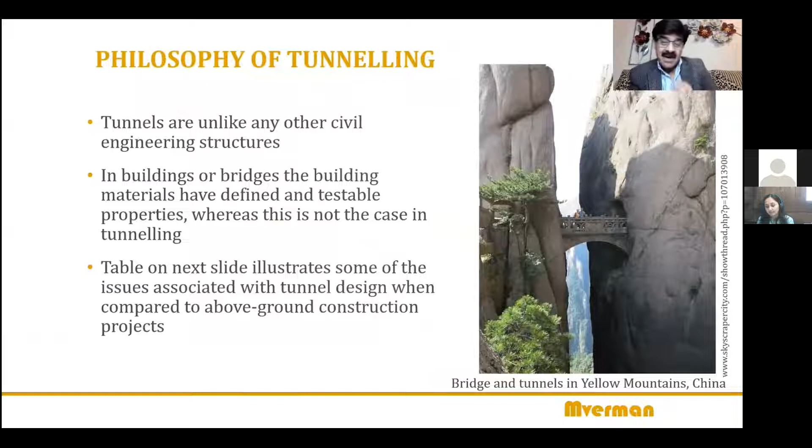We've already discussed one of the challenges. Let's talk about a bit of philosophy to understand the next one. Tunnels are not like any other civil engineering structures. Other structures, like the building you're sitting in or bridges—surface structures—are built using material such as concrete, bricks, and mortar, which have defined and testable properties. But that's not the case with tunneling. We'll talk about it in a bit, because there's a table coming up on the next slide showing some of the issues associated with tunnel design compared to above-ground construction.

So let's compare these two types of structures—traditional civil engineering above-ground construction and tunnel construction—on the basis of three parameters: construction material, loads, and safety.

As far as construction materials are concerned, buildings, bridges, and surface structures are built using man-made materials which have testable properties, and those properties can be guaranteed by quality control procedures. But that's not the case with tunnels, because tunnels are built largely using natural ground—soil, rock, alluvium, colluvium, debris, boulders—and we don't have the capacity to influence its behavior.

As a civil engineer or structural engineer, you can say 'I need M35 concrete, even M32.5 concrete,' and you will be given it. But you cannot order that you'll only build a tunnel where the compressive strength of the rock is 120 MPa—you can forget about building a tunnel. You have to build that tunnel in the given ground conditions. It is a major difference.

Coming to the loads—for the structural analysis of surface structures, you know the loads: the live load, the dead load, the wind load, the earthquake load, all kinds of loads, and you can design your structure for that. In tunneling, forget about it. You have to make assumptions. You're never sure about the loads, particularly for deeper tunnels.

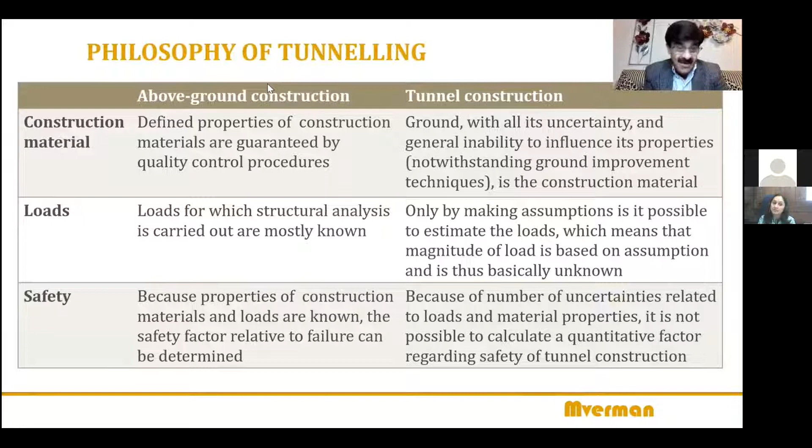Yes, those are man-made materials, but these are support systems installed after excavating the tunnel, because once you excavate, you remove material that was there for millions of years. So the stresses readjust, and the physical manifestation of that readjustment is that the excavated tunnel converges. You do not want to permit a lot of convergence, so you install some support.

So yes, those are man-made materials, but by and large, it is the natural ground which is the key material used for tunneling—the soil, the rock, etc. So the key to successful tunneling is to understand this material: the strength properties, the deformability, the stability characteristics. That is why investigation becomes so important in tunneling.

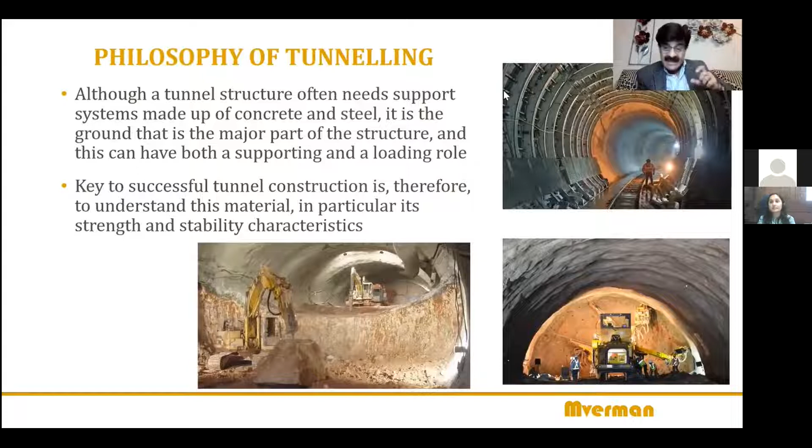But the fact is, it is the investigation which is not done properly in most tunnels. In many tunnels, it is difficult to do intensive investigation, and in many it is neglected. I don't have much time to go into it, but there are issues with this. So you can understand the challenges of tunneling.

Now, I have skipped a few slides in the interest of time, and come to this slide. There have been many questions raised about tunneling because of the uncertainties. Many of those questions do not have a single answer, but depend on the individual case, because no new tunnel construction is the same as the previous construction.

If you come across somebody who says, I have built many tunnels in similar conditions, don't worry, it'll be a cakewalk—stay clear of that person. Never underestimate the challenges you can expect in any tunnel.

The key to understand is that tunneling is not a discrete science. It doesn't have definite answers. There are many unknowns when dealing with tunneling, and the answer to most questions is: it depends. So therefore, you need experience and engineering judgment to help make a considered and informed decision. At the end of the day, you carry out the design based on several assumptions and approximations.

So when the tunnel actually goes for construction, a good designer would be biting their nails, because now is the test of whether the actual tunnel will behave exactly as you perceived. So you have to carry out extensive monitoring and instrumentation once the tunnel starts to be built, so you are sure it is behaving just as you thought during design.

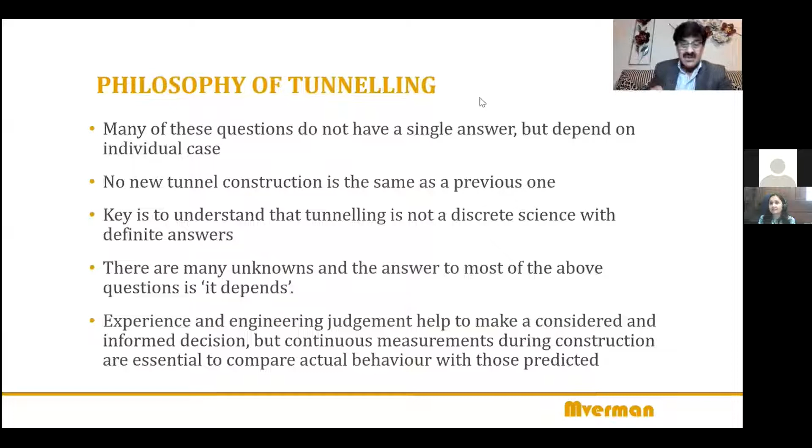So more challenges. Now let's talk about some more challenges in tunneling. When we talk about typical civil engineering structures, we talk about two major aspects apart from others: design and construction. In tunneling there are three: design, yes; construction, yes; but also tunneling approaches. These tunneling approaches play a very, very significant role in tunneling.

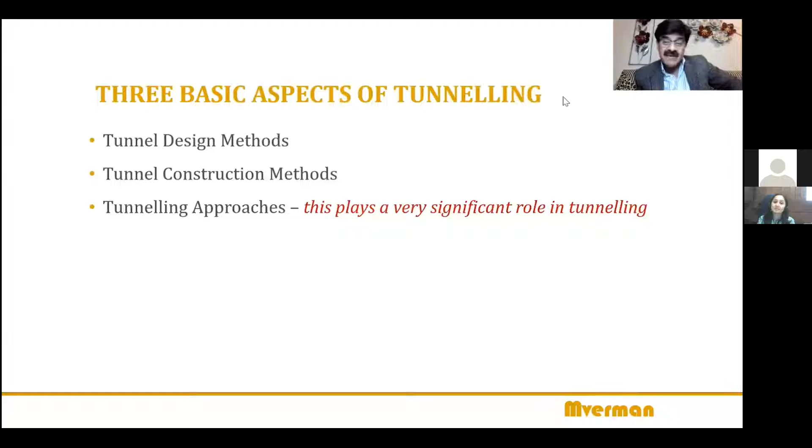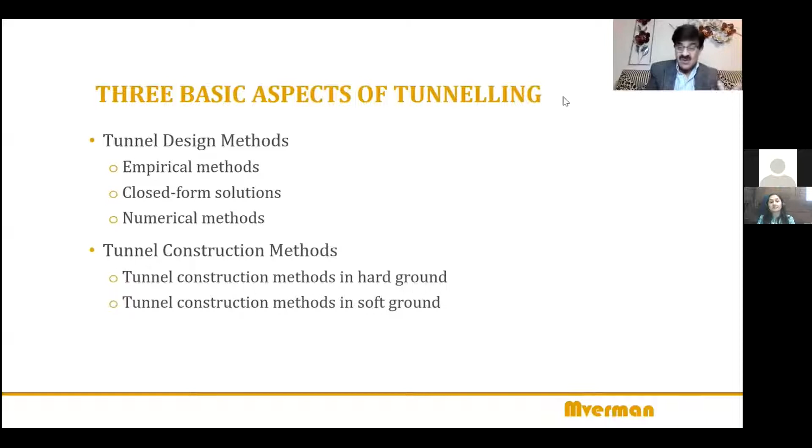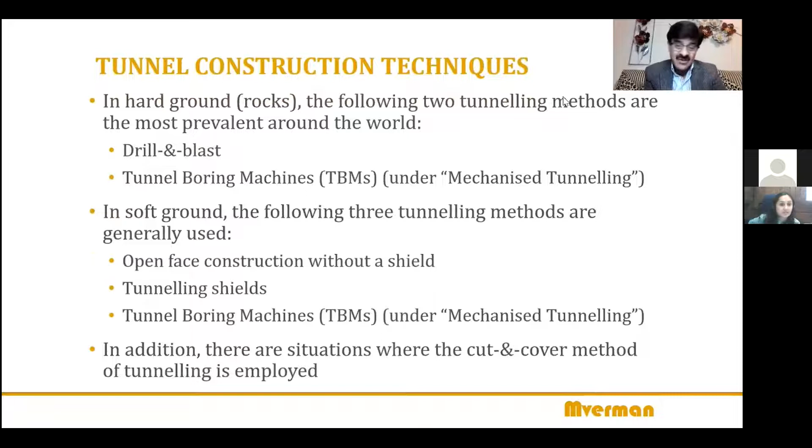What are these approaches? When you come to tunnel design methods, there are several, and there are challenges—unfortunately I don't have time to go into it. Tunnel construction methods differ for hard ground such as rock and soft ground such as soil. Here are some methods listed for hard ground and soft ground, and other methods not strictly tunneling but used in tunneling projects. Again there's no time to go into it. So: design, construction, yes, but also tunneling approaches.

Many of you must have heard about this term called NATM, New Austrian Tunneling Method, one of the most widely used terms in tunneling, and therefore one of the most misunderstood terms in tunneling. Some of you may have heard about Norwegian Method of Tunneling, NMT, and a smaller number may have heard about TBM tunneling. All of them very exciting, and if you go deeper into these three topics, you gain a lot of wonderful insight into how tunnels behave when you construct them.

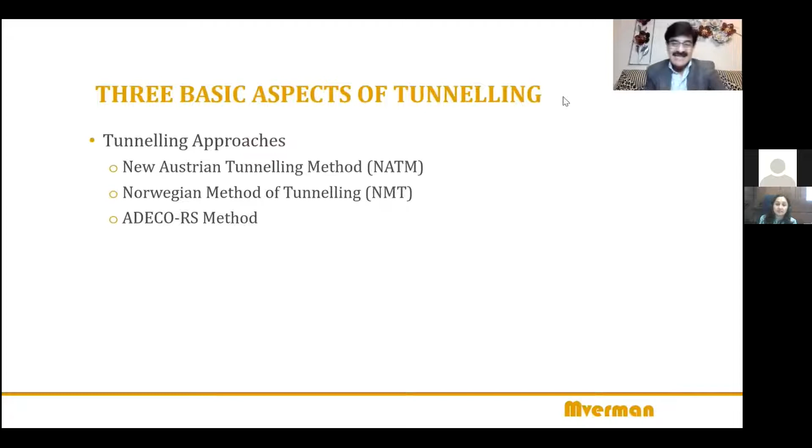But this additional aspect which you have in tunneling, which you don't have in other civil engineering structures, lends another challenge to tunneling. And when I talk about challenge, I'm not talking about it as a negative term. I see anything which has challenges as exciting and adventurous. That's how I look at tunneling, so tunneling is very exciting because of the challenges.

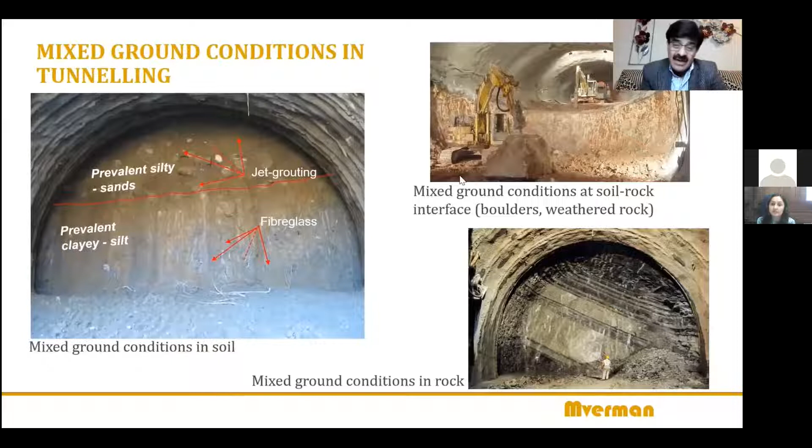Similarly, there are some other examples of mixed ground conditions here, and these mixed ground conditions can pose a lot of challenge to tunneling. Again, there's no time because each of these topics requires half a day at least.

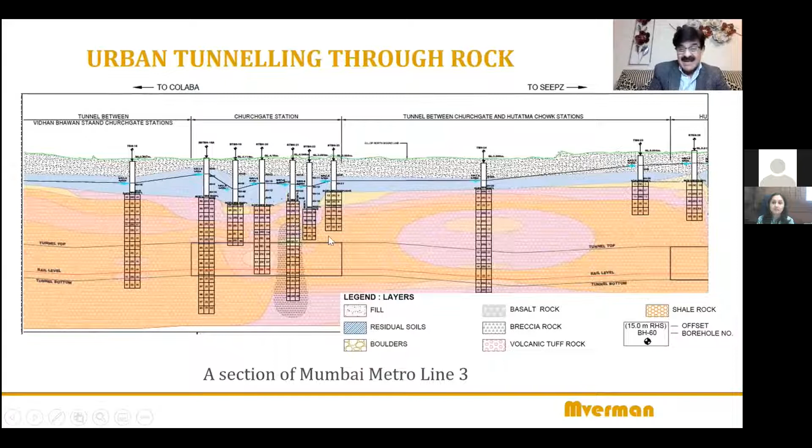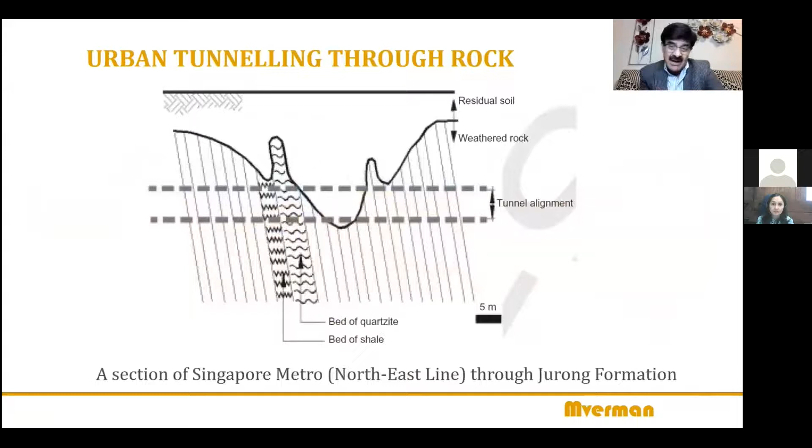I have to skip some of the examples because we don't have time. Example from Singapore - again, urban tunneling, again varying ground conditions, which put so much challenge in the tunneling operation. And some more description of these kinds of challenges in urban tunneling.

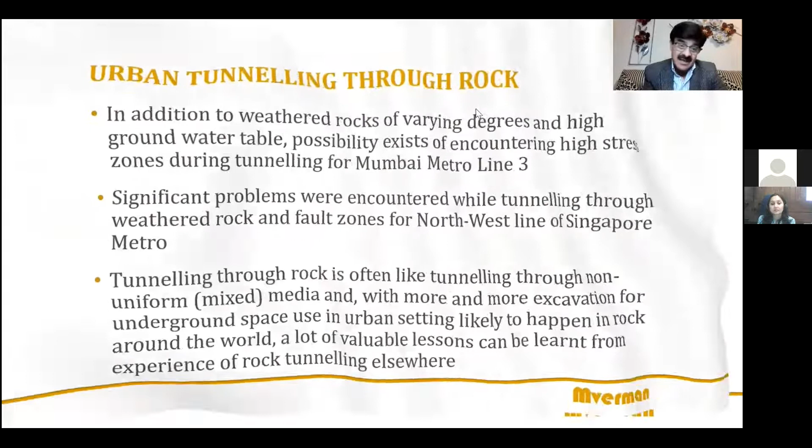Talking about mountain tunneling now. You see, you have a short time available and you want to leave an impression - do it with a lot of drama, go to the extreme, and that's what I'm going to do. I don't have much time, so I'm going to pick up the story of mountain tunneling with three of the most difficult tunneling media in the world, such as the Himalayas in the Indian subcontinent.

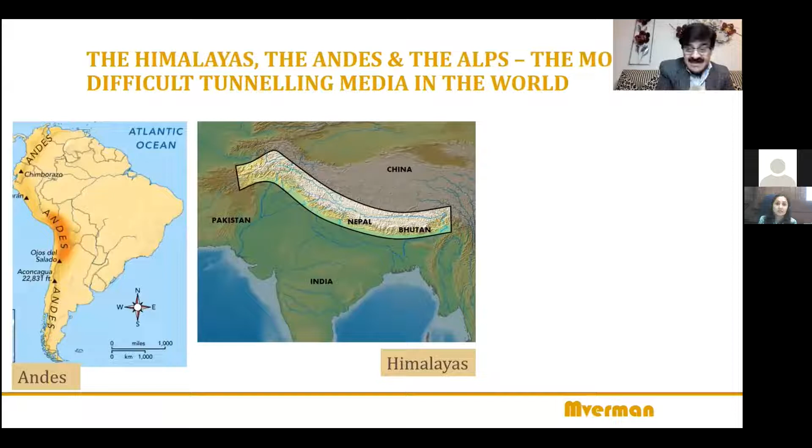You have bits of Pakistan, many Indian states, Nepal and Bhutan, and northeast of India. The Himalayas are considered the toughest tunneling media in the world, followed closely by the Andes towards the west side of South America, and that followed closely by the Alps in Europe. These three are younger mountain formations - geology is not fully settled.

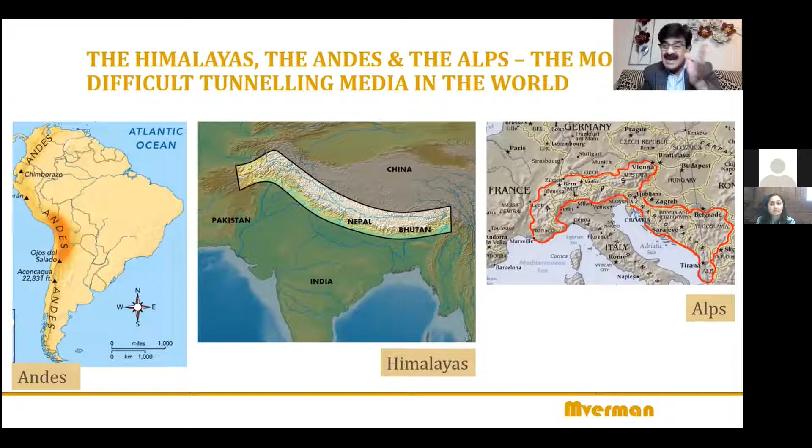So when you tunnel through these conditions, you have widely varying and frequently varying ground conditions, a lot of groundwater, high stresses, fault zones, shear zones, water problems like those, which can make tunneling an extremely challenging operation. Himalayas are the toughest, followed by Andes, and those followed by the Alps.

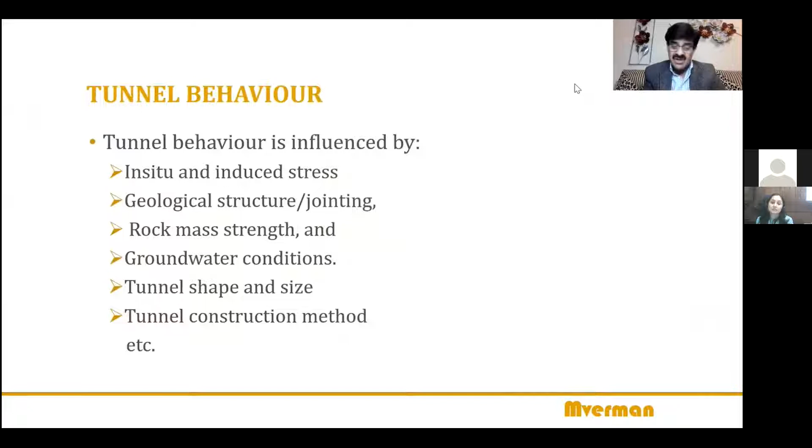Just to understand a bit more about what sort of problems you can expect while tunneling in these conditions, let's see the many aspects which influence the behavior of a tunnel when you build it, like in-situ stresses, induced stresses, geological conditions, rock mass strength, groundwater condition, tunnel geometry, tunnel construction method, etc. Now let's talk about only two of these aspects.

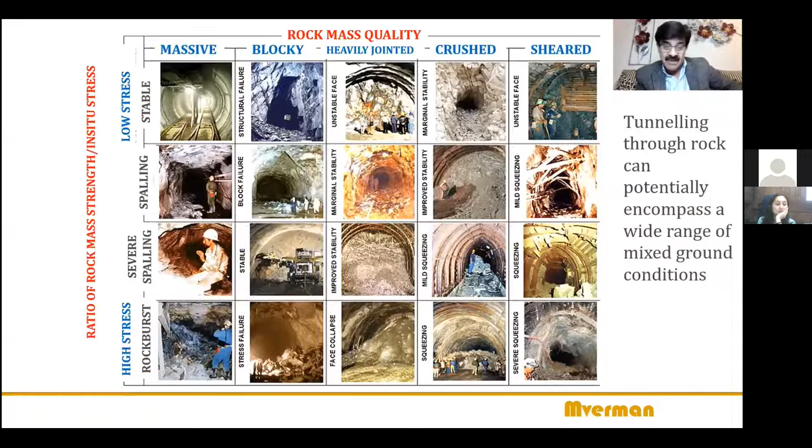Combination of these two aspects can result in so many different behaviors when you tunnel through these conditions. You can see that if you include more parameters, how much more challenging tunneling can become. When you have different behaviors, you need different design solutions. That's another challenge in tunneling in these conditions.

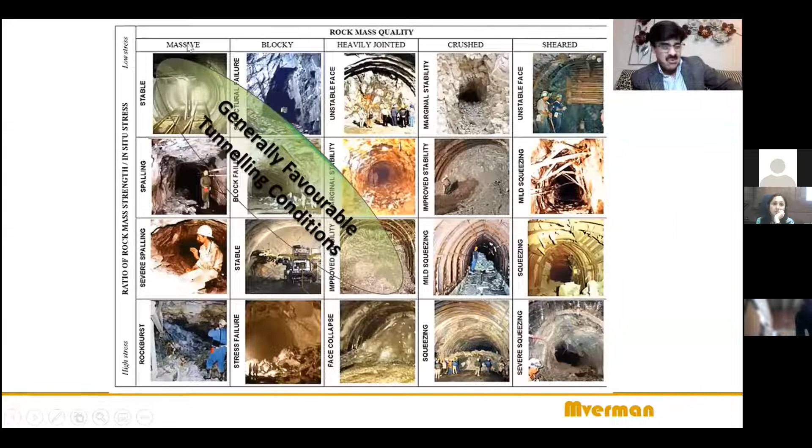For example, this little band here is generally favorable tunneling condition. The reason is massive means good rock mass. You would imagine good rock mass would be good tunneling condition. Yes, it is, but only when the stresses are low, because when the stresses start to increase, a good competent rock mass will not be that stable, and I'll talk about it in a bit.

So this band doesn't go down straight, horizontal. Why? Because when you have blocky rock mass, it's not massive, it has got more joints. Those joints, when they crisscross each other, form blocks of rock. These blocks can slide into the tunnel when you cut it, but only if they're not properly clamped. For example, here is one block, here's another block.

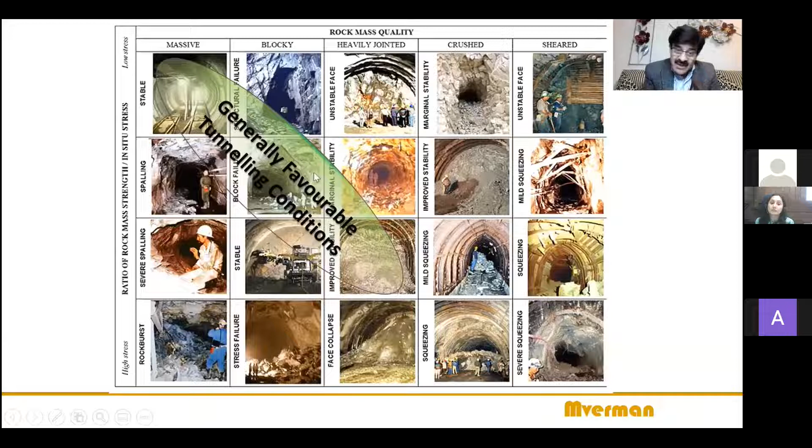If they are properly clamped, somebody pressing them together, then they will not slide into the tunnel. But when you have low stress, that stress is not good enough or high enough to clamp them together, so they will slide. That is why this favorable band doesn't go straight across. It goes down, because when you have some stress, that's good enough to clamp them together, but not too high, so it goes a little inclined for this generally favorable condition.

When you have this thing going from left to right, which means going from blocky to poorer and poorer rock mass, in low stress regime, this kind of failure will increase because stress is not high enough. You are in low stress, but the number of joints increases as you go from blocky to heavily jointed to crushed, meaning more smaller blocks, and there isn't enough stress to clamp them together. They're likely to slide into the tunnel.

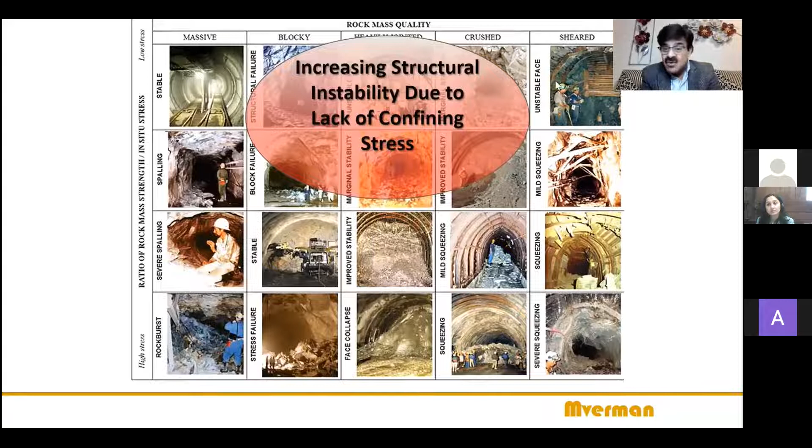So this is called structurally controlled instability. A joint like this is a structural feature of the geology, so it's controlled by the structural features. When you go in low stress regime, that's what can happen. In the extreme, you can have caving, and I'll show you a picture for that. Anyway, this is what I mean by structurally controlled instability.

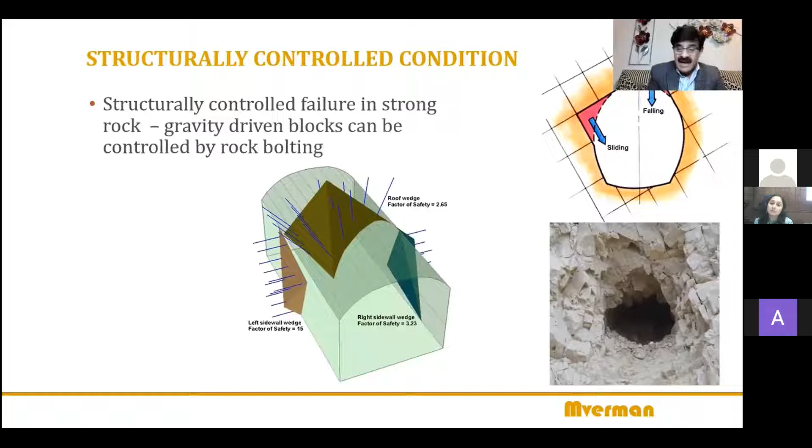When you have these joints crisscrossing each other and you cut a tunnel through this, these blocks, for example these red ones, can fall or slide into the tunnel, provided the joint between them has low shear strength, allowing it to slide. You can analyze this using a computer program and design support systems, in this case rock bolts. Here is an example—you can see the open joints which will allow these blocks to slide into this opening.

Here is an example from a project in Argentina, a 12-meter span tunnel, where from this place, one such block sliding along the joint has fallen freshly on the ground.

I experienced one in the state of Kerala in India, and we were standing in the middle of the tunnel. This was 1986. As a young engineer with stars in my eyes, I was standing with a group of senior people. I was looking at them, thinking how knowledgeable these people are. I didn't know much about tunneling. Then somebody says, Sirs, could you step aside because there's a truck coming?

So we moved to the side, and there was a puddle of water, so we went ahead 20 meters along the tunnel. As soon as we reached that place, we heard a loud thud, and we looked back. Exactly the place we were standing a few seconds back, a big chunk of rock like this came crashing down. That was the structurally controlled instability. We would have been flattened if destiny hadn't saved us. So I live to tell you the tale.

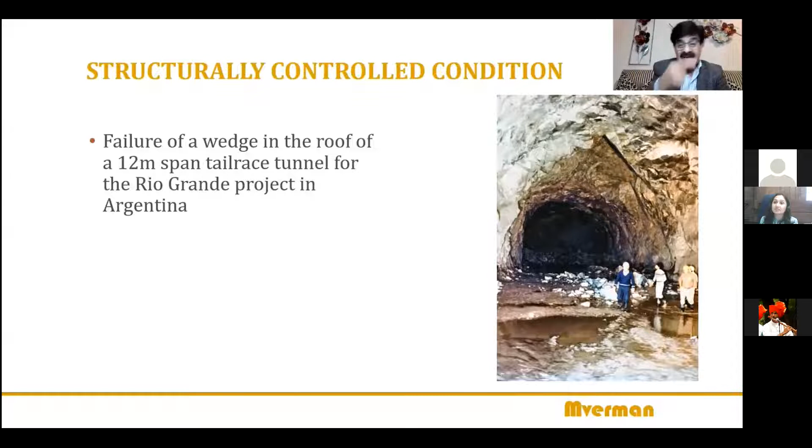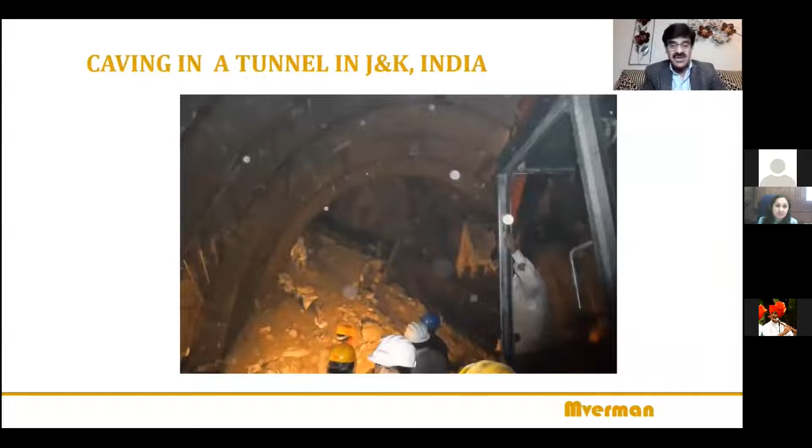What will happen? As the stress increases in good quality rock, it will behave in a brittle fashion. For example, this is my mobile. If I apply stress, you won't see much deformation, and suddenly it will break in a violent fashion. But if I hold a piece of rubber and bend it, applying the same stress, you will see a lot of deformation. You can visibly see that is ductile behavior. But a good competent rock will show a brittle behavior.

So what will happen? In the worst case, you will experience rock burst, which is a sudden violent failure. In deep mines, for example Kolar gold fields in India, now closed down with all the gold taken, at 2.5 kilometers depth, there is a lot of stress because of the depth, combined with good competent rock. When it fails violently, it can kill people. It has killed people, rock burst.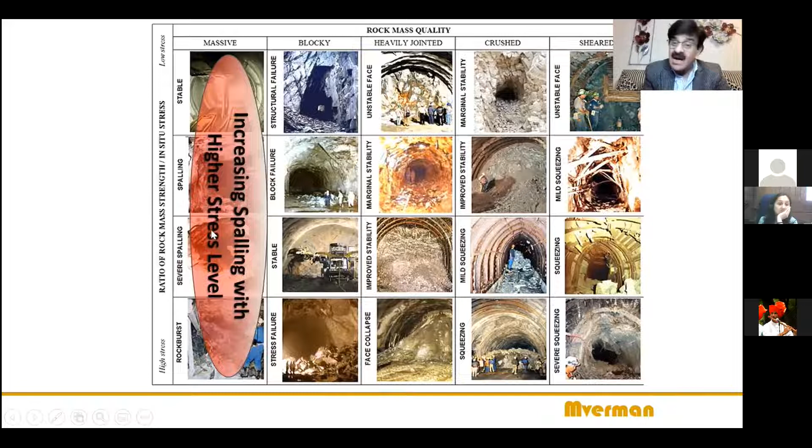Now, leading up to the rock burst, you can have severe spalling, the chunks or slabs of rock spalling away. That is a brittle failure in massive rock, good quality rock mass under stress. So spalling and rock bursting happen under high stress in good quality rock mass.

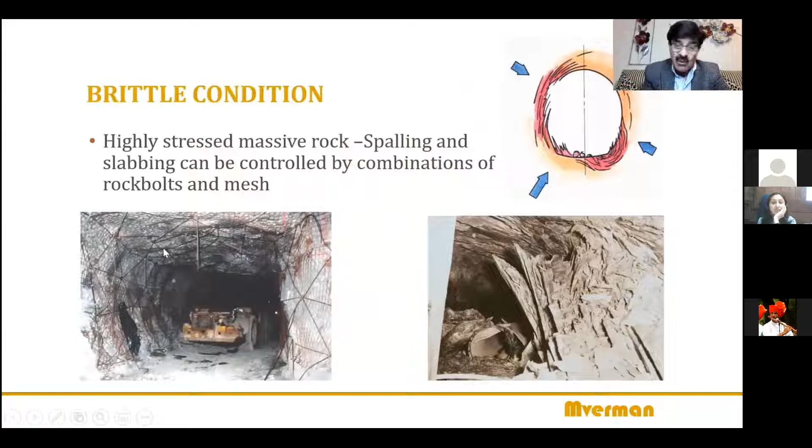Something like this. These are some pictures from a rock burst condition. You can see the spalling taking place, and that's how you secure the area. I have a couple of videos to show you, and I'll do that soon.

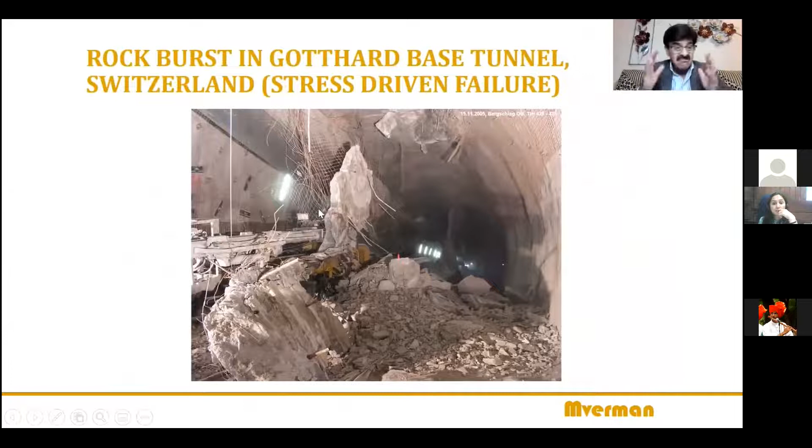This is a picture from the tunnel I mentioned some time back, a very deep tunnel in Switzerland, and it suffered rock burst at some locations. This is the aftermath of one such rock burst episode. You can see it destroyed so much of the material and support system in the tunnel. Sudden, violent failure. This is also another example.

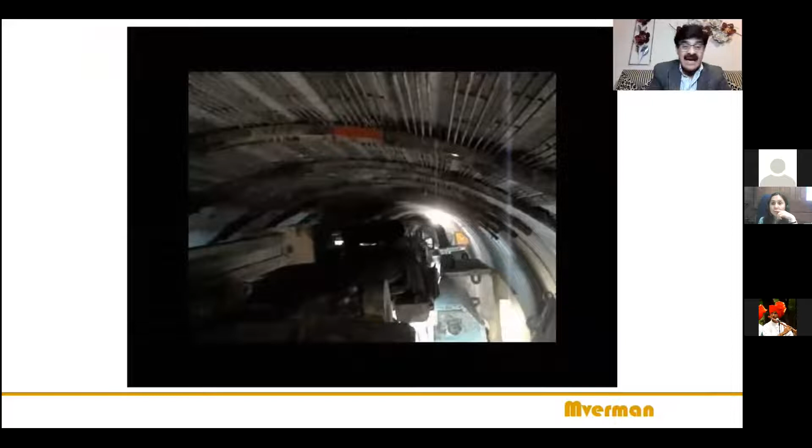Here is a video. I'm going to show you very small videos from South America, the Andes. In the first video, you will see a minor rock burst, a kind of cracking sound, but the area is properly secured, so it will damage a bit of the support system, but not much. After this, I'll show you the real rock burst. I'm going to play the video now.

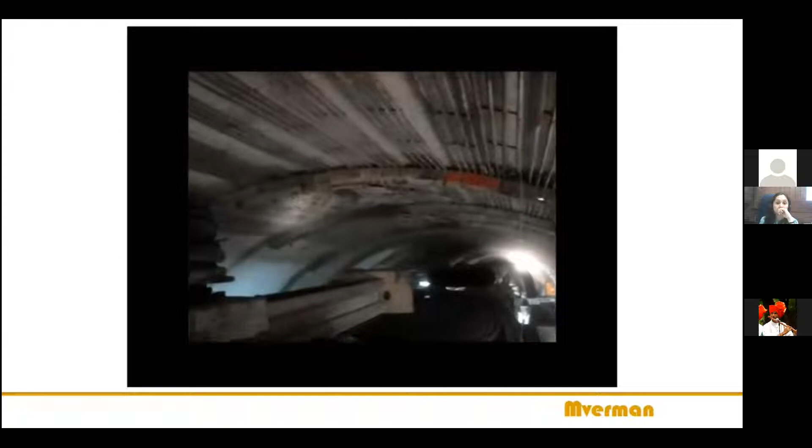I hope you enjoyed watching this, and now to the real rock burst.

In this video, you see a drill bit, they're trying to do some drilling. I was told they were trying to de-stress the area, one of the ways of reducing stress is to drill some holes. I'm not sure whether they are drilling for drill and blast operation or for de-stressing the area, but the cameraman is focusing on this part. However, something is brewing on the top right part of this tunnel. Keep a watch on the top right, and you will see something coming up.

I'm going to play the video, and this is the real rock burst. You can see the drilling is in progress, but something is going to happen on the top right corner.

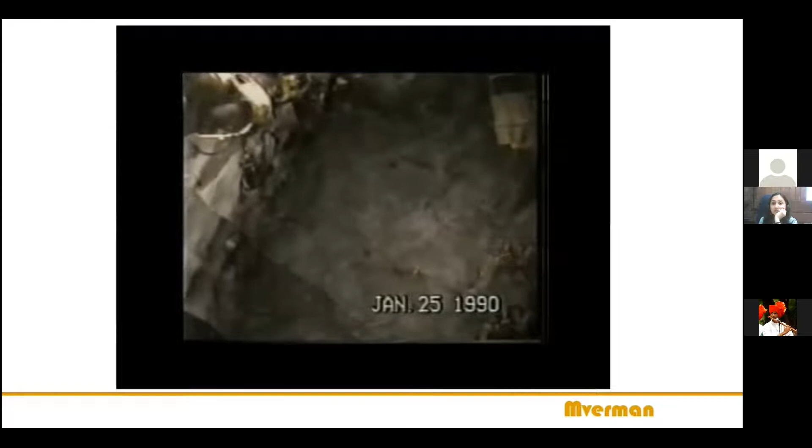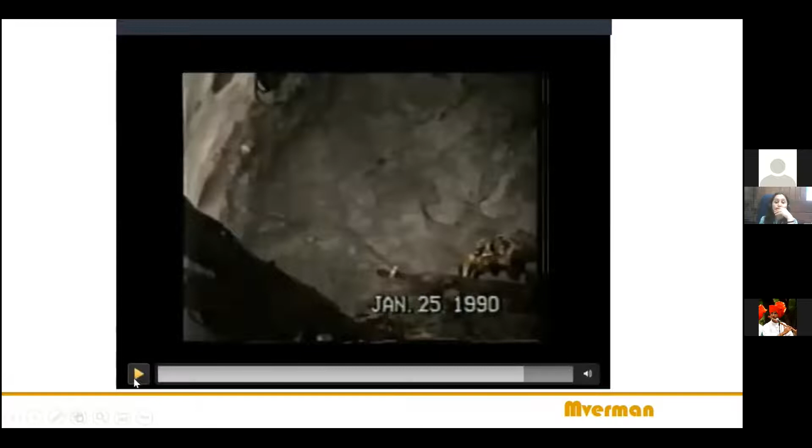Let me play the last few seconds once more for you. That is the real rock burst. I hope you got a glimpse of how a rock burst looks. This was the case when dealing with a brittle rock mass.

So now let's go to the other extreme of this chart, dealing with very poor ground condition, shear condition, and increasing stress. So far we were talking about increase of stress in massive, good quality rock mass. Now we go to poor ground condition and look at what happens when stress increases. The behavior will be like a ductile, plastic behavior.

In this case, in poor ground condition under high stress, you will not have violent failure. I gave you the example of the piece of rubber, when I bend it you see a lot of deformation. So here, what you're going to have is squeezing ground condition.

When you build a tunnel in these conditions, under high stress and poor ground condition, you will have excessive convergence. Excessive convergence can be really frightening.

One of the earliest projects in my career, I remember this was a tunnel being built in the Himalayas. In those days we did not have any night shifts, so we used to go there occasionally. That week I was there with my colleagues, and we were there till that evening. The tunnel was going through relatively poor ground condition, high overburden, high stress, about 550 meters under the mountain. According to the design, very heavy steel supports were put in the tunnel, and the work was closed for the day. Everybody went home. Next morning, I came...

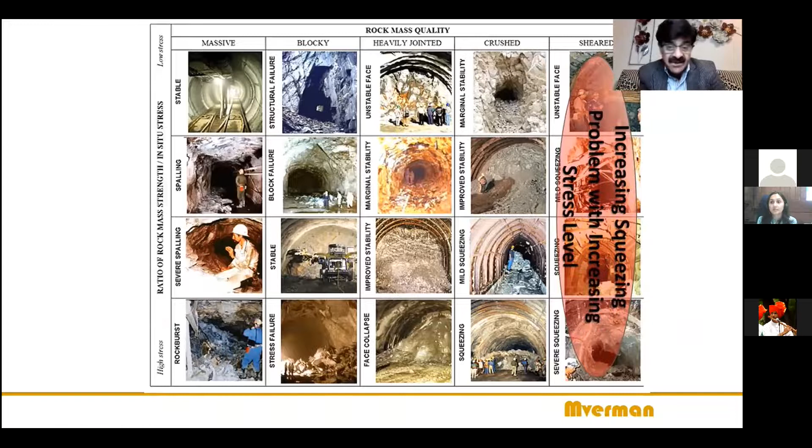Challenges of tunneling - these are some examples of squeezing ground condition. This is from a project in Nepal, which I visited in 2013 in a very remote area. It took hours and hours to reach there, and you can see it was squeezing big time. These walls have come inside, and the contractors working in those remote projects didn't have any arrangement to control it. You can see the primitive arrangement the Chinese contractors put in place there.

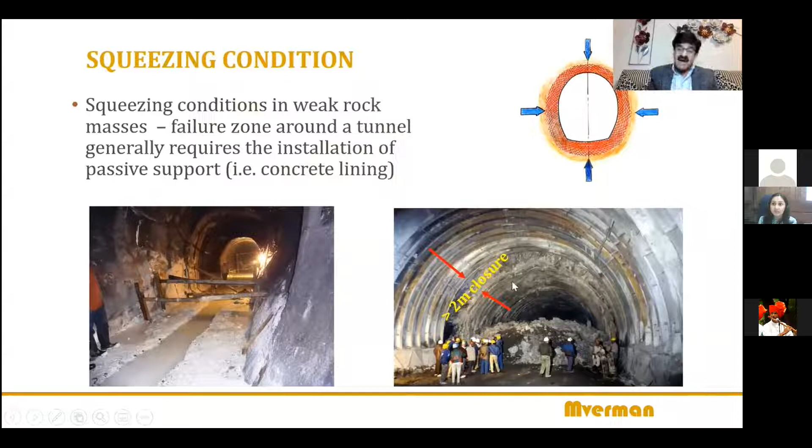This is from an Indian project where it squeezed by more than 2 meters. You can imagine. The only way you have is to remine the area, which can be very time consuming and very expensive.

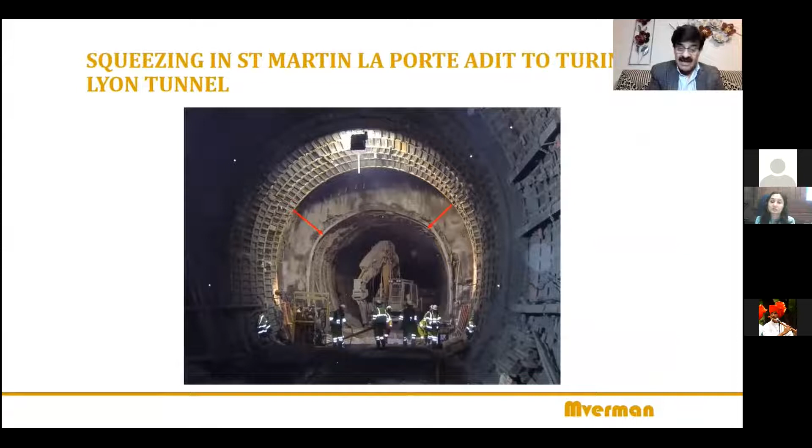This picture is the poster boy of the squeezing world. Anybody making a presentation anywhere in the world on squeezing ground condition will be showing this. This is from an ADIT - a smaller tunnel used to approach the main tunnel. There's a project under construction connecting Italy to France, between Turin and Lyon, going through the Alps, and it squeezed a lot - so much that the cross section was reduced, and these workers are now preparing to remine this. As I said, remining can be very expensive and time consuming.

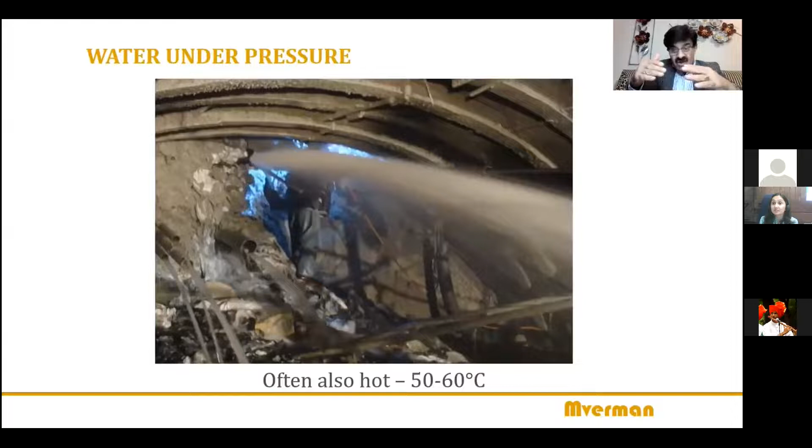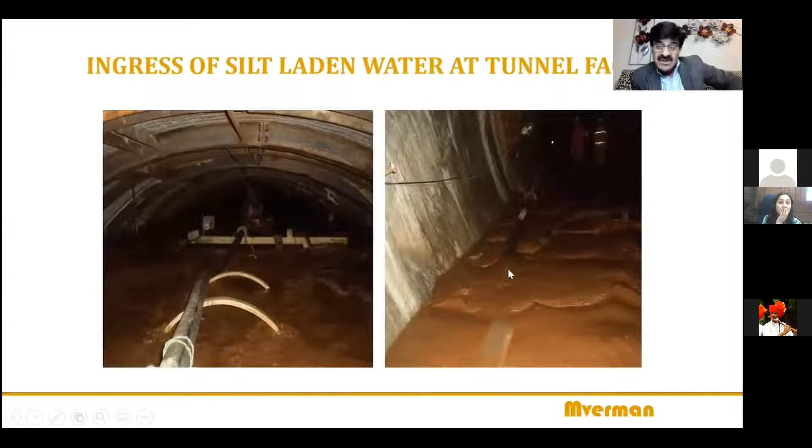Apart from these stress related problems, in these difficult mountain conditions you can have water coming in, sometimes hot, from geothermal energy. This particular water is coming from a tunnel in the Himalayas, where a hole was drilled to probe what lies ahead of the tunnel face. Water started coming from this and it just kept coming for several days. After a day or two, the fresh water started bringing a lot of silt with it, scouring the material. Over time it inundated the full tunnel up to 1 kilometer, and the tunnel boring machine was covered right at the top. This is close to the face, and this is away, close to the portal entrance. The project was delayed by several years - can you imagine, just because of this water?

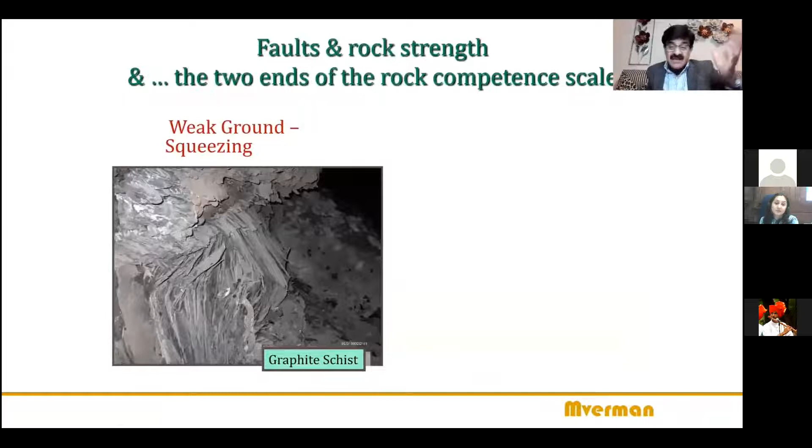So the trick really is to do good investigation so that you know what kind of problems you are expected to encounter, and you are ready with an answer to that. The first answer is, while finalizing the tunnel alignment, do extensive investigation and try to avoid taking the tunnel through problematic zones - minimize right at that stage. If you can't avoid such things, your investigation results will tell you what problems are expected to be encountered, so that you are ready with a plan to tackle this.

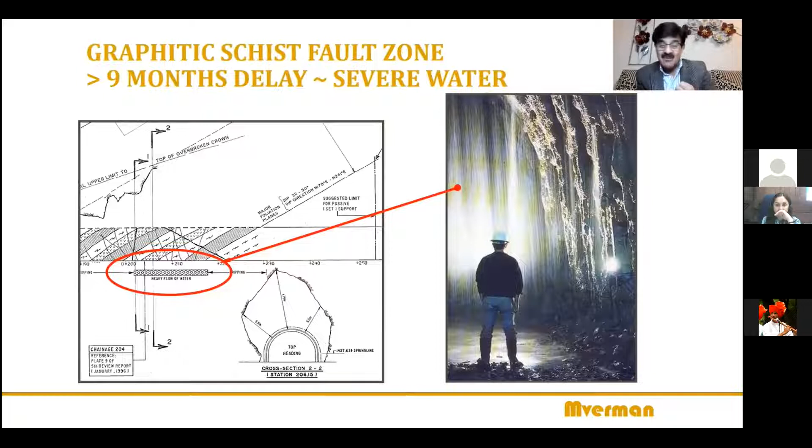There are approaches available, and that's the fact. You can take heart from the fact that despite all these problems, there are solutions available. Only thing is, you should be aware of the problems you're going to expect, so you can build safe tunnels. Before I close, I'd like to show you one small video from a difficult ground condition.

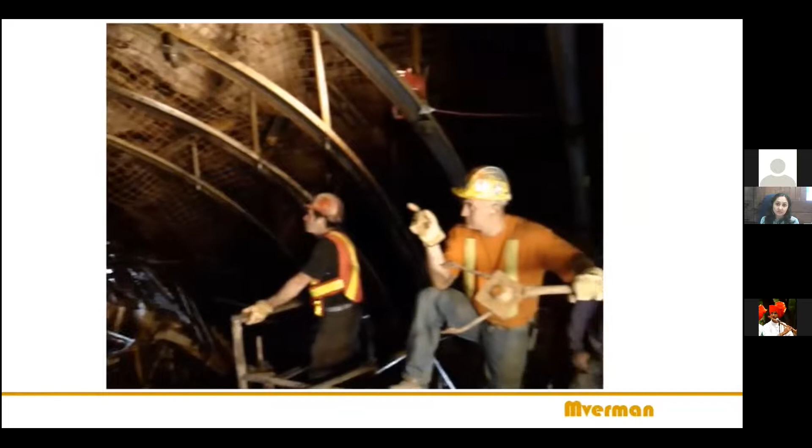In this presentation, I hope I was able to give you some flavor of the challenges in tunneling. As I told you, it's simply impossible to talk in any great detail about tunneling and the challenges you can expect or usually encounter in this small presentation. So thank you very much for your patience, ladies and gentlemen.

Sir, I hope it was audible. Yes, yes, to me, but it's more important for others to see it. I hope, despite the shortcomings, it was okay. I enjoyed it, I hope.